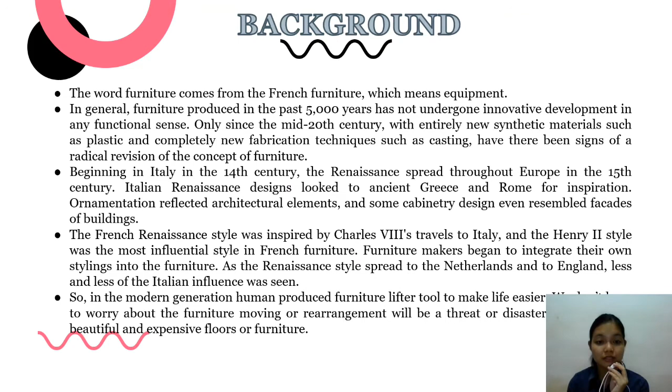So, in the modern generation, humans produce furniture lifter tools to make life easier. We don't need to worry about furniture moving or rearrangement being a threat or disaster to our beautiful and expensive floor or furniture.

And this is the objective of our project. Firstly, to make an easy furniture lifter tool using cheap material. Secondly, to make moving our furniture easier using our own natural strength. And thirdly, to avoid damage to our furniture and floor while moving the furniture.

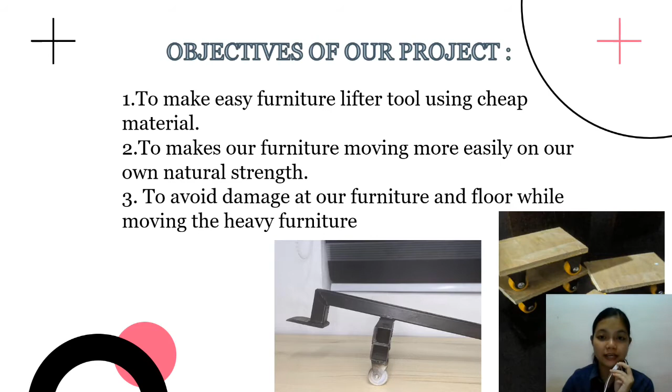Okay, for methodology, I'm going to talk about project specification, project features, and project costing. The project is a furniture lifter tool for easy use of household appliances. Project specification is to confirm that the terms are appropriate and suit the project requirements. In other words, this is a list of the project's physical characteristics.

There are two items for this project, which are roller pads and lifter. For roller pads, the height is 4.8 cm, base area length is 13 cm, and base area width is 8 cm. The mass for roller pads is 300 grams. It's built using plain wood and roller, and we bind it using screws.

Next is the lifter. The height for the lifter is 11.3 cm. The base area length is 61.2 cm, and the width is 20.5 cm. The mass is 1.3 kg. It's built using hollow steel and plastic wheels.

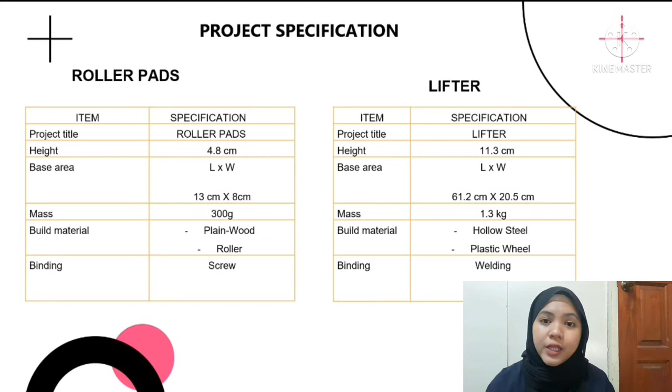We bind it by using welding. This is the roller pads, and this is the lifter.

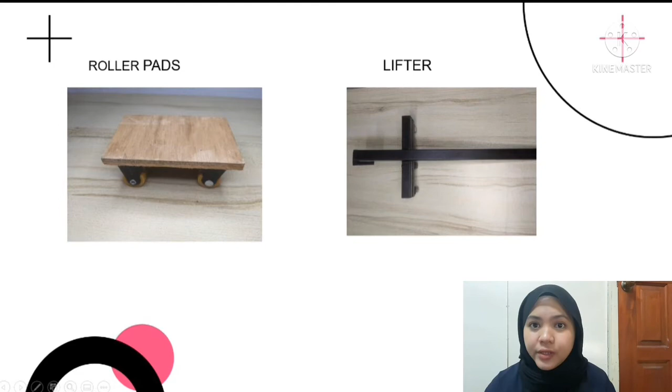Next is project features. There are 4 main items we use to build the project. The first one is plain wood. It's a thick wood which is lighter in weight.

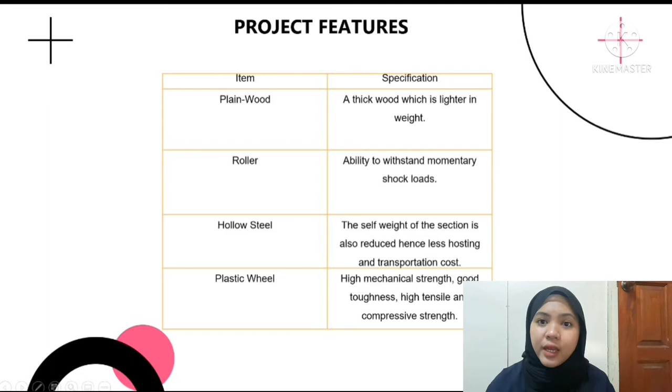The second one is roller. Its ability to withstand momentary shock load. The third one is hollow steel. The self weight of the section is also reduced, hence less hoisting and transportation costs. Lastly is plastic wheel, which has high mechanical strength, good toughness, and high tensile and compressive strength.

Okay, the last one is project costing. They have 4 items, which is plain wood, roller, hollow steel, and plastic wheel. Firstly, for plain wood, we are using 1 quantity, which is 8 ringgit 99 cent.

Next is roller. We need 4 quantities, which is 1 ringgit 49 cent each. So the total for roller is 5 ringgit 96 cent. Next is hollow steel. We only need 1 quantity, which is 12 ringgit 50 cent.

Last one is plastic wheel. We use 4 quantities, and the price is 2 ringgit 6 cent each. So the project costing in this project is 35 ringgit 69 cent. Okay, that's all from me.

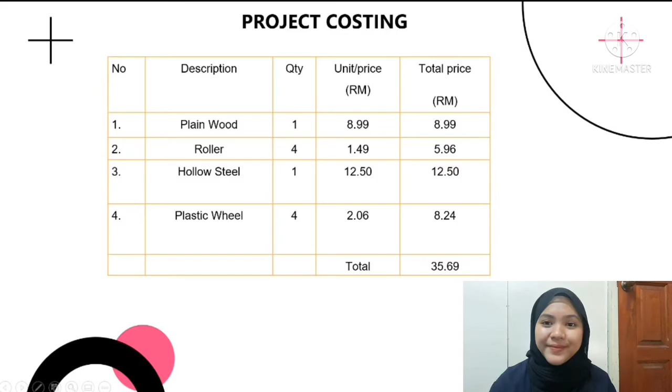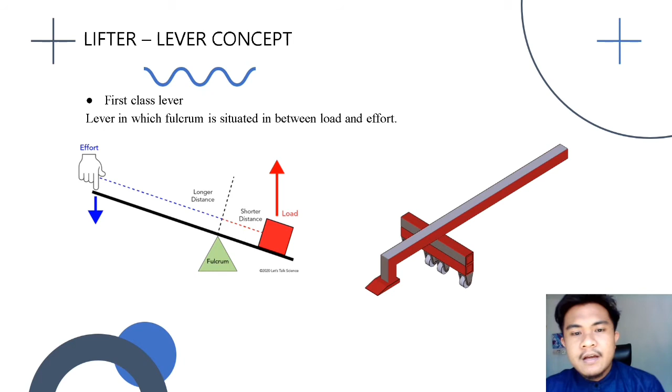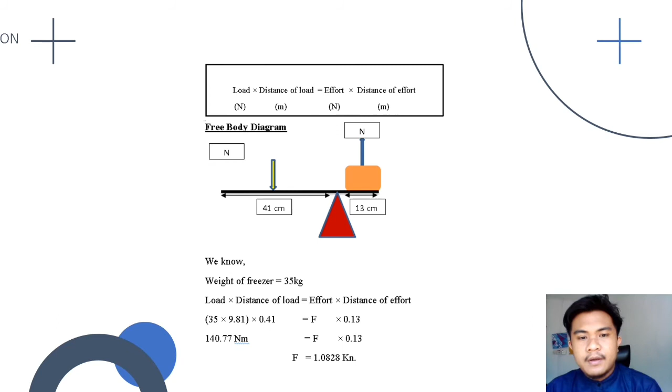There are 2 concepts applied in the experiment. The first concept is a lever concept, which we can use on the lifter. In our experiment, the first class of lever is involved because the fulcrum is situated in between the load and effort. After we calculate using this formula, we found out that 1.0828 kN of force is needed to lift up the load.

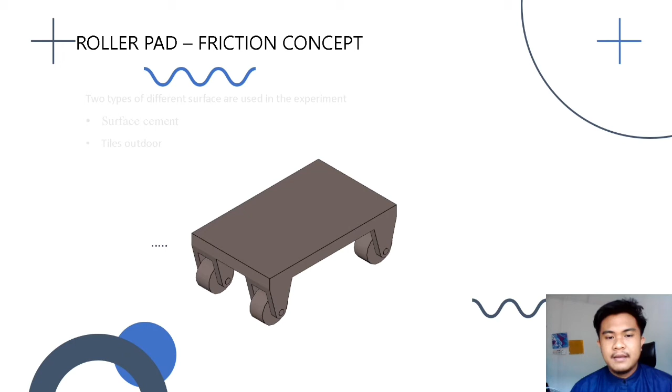So for the surface cement, we can calculate that 199.14 Newton is at least the amount of effort to apply this load on this bare concrete surface, with the coefficient 0.58.

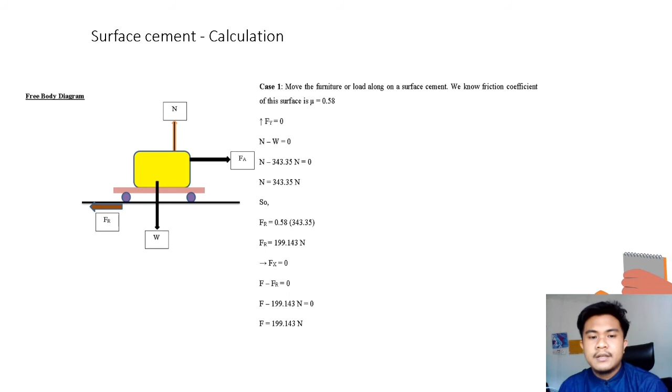Lastly, for the tile surface, we can conclude that 216.31 Newton is at least the amount of effort to apply this load on the outdoor tile surface, with the coefficient 0.63.

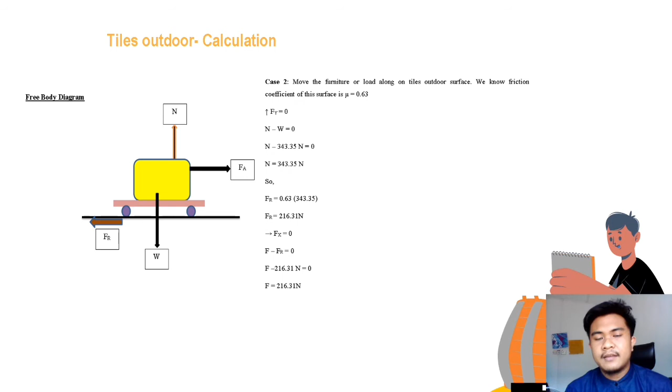Okay, for this slide, I want to explain the discussion for our project. We have 3 discussions from our project. First, we determine the design of the furniture lifter as well as the dimension of the lifter.

Second, we have used our knowledge to calculate the aspect of the lifter as dry friction. Lastly, we also apply the lever concept theory because we determine how much force is required to hold up the furniture to put on the roller pad.

But in the syllabus mechanics machine, we have not learned about the theory of lever concept, but we apply it because we need to determine how much force to hold up the load of furniture and put it on the roller pad.

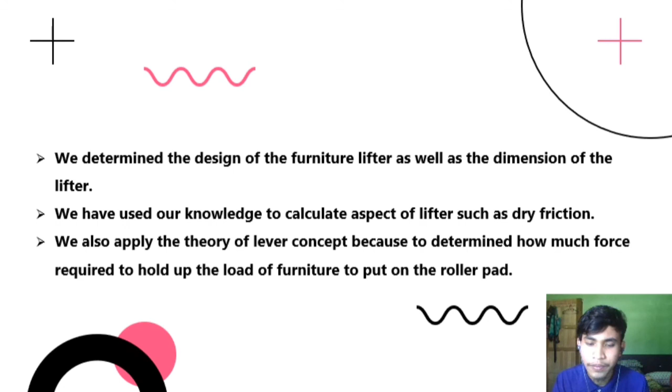For the conclusion for our project, first the furniture lifter that we build could hold up the load of furniture that is imposed on it.

Second, we discussed and decided on that design because its structure of joint relates to several important mechanical mechanisms, such as the application of dry friction and the lever concept in this project.

As my friend calculated, we calculated dry friction and lever concept because our project is related to two applications. Third, we also learned that design and fabrication with a large base area will provide greater stability, because we made the hypothesis.

But not just me and not my group—everyone has a logical hypothesis that a large base area will provide greater stability. Okay, that's all from me.